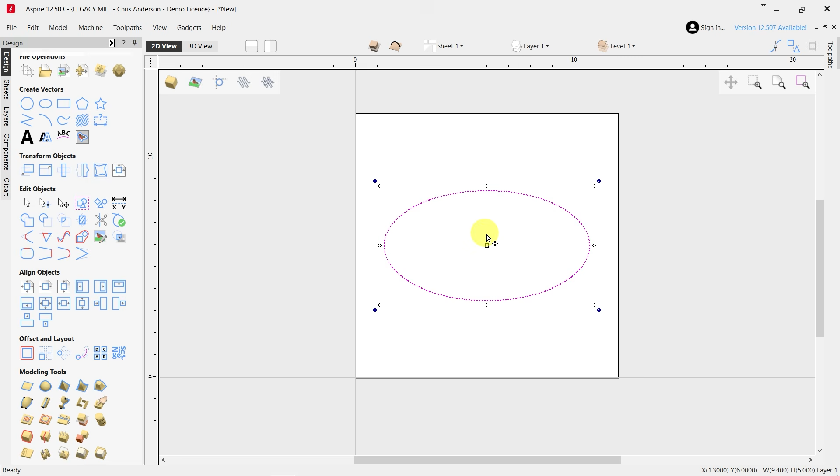So let's say we set it up to flip horizontally just like we did with the seat, and we push OK. Now here is what we're going to do. We're going to draw an elliptical shape here, saying that we're just going to cut something out of the shape, and I'm going to rotate it 45 degrees so it's not symmetrical in any way. It has a different layout for side 1 and side 2.

Now the most common thing that causes problems with this technique is if our blank isn't the exact size called for in the software. I'm going to draw a rectangle here that isn't the exact size. So the software calls for a 12-inch by 12-inch blank, but here let's say this was 11.9 by 11.9. You may be that far off, or less. Regardless, I just want to show you a more dramatic example so you can understand what's taking place here.

So this is going to be side 1. Now to flip to side number 2, you just click this button and it flips over to side number 2. I don't have any vectors on this side yet, so let's go back to side number 1 and use these to copy and mirror to side number 2.

So I'm going to select these, right click, and say copy to other side. Now if we flip over to the other side, this now has side number 2.

Now I want to point out, the bottom left corner is XY0, so the edge of the parts are going to be aligned with XY0, and we can even set a fence on our CNC for that corner.

And if we cut the blank out, let's say we were off by 0.1 inches from what was called for in the software, that's the difference here, 0.1 inch off in real life versus the software world.

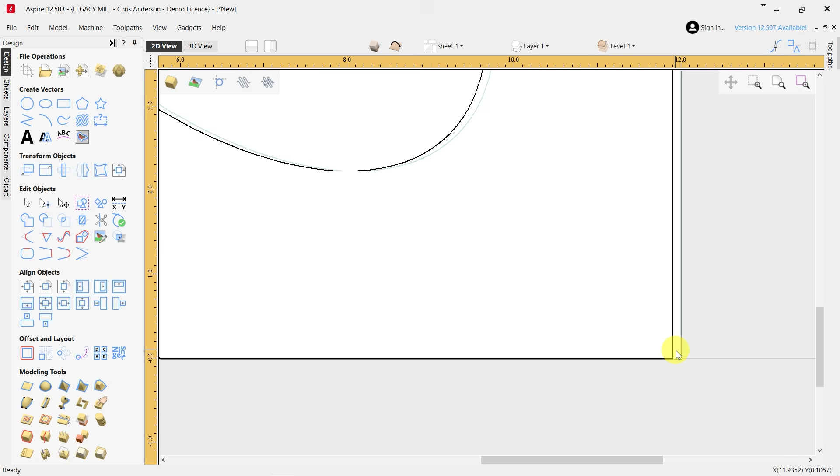So if we go to side number 2 now, when we make the bottom left corner the same XY0, that corner is going to line up with the XY0. Because if you have a fence and choose to make that corner XY0, that edge is aligned just like side number 1. So we have the same gap on the right side because XY is always staying in this corner.

Now you can see that when I shifted that back to that corner, because that's exactly what happens in the program and setup, we get some misalignments between side 1 and side 2. The gray line represents what's on the opposite side of the part, versus the darker lines are what we have on this face.

Whatever the distance is of what you are off physically from the software, in this case 0.1 inches off, it's going to double that. It's going to be 0.1 inches off on the right and 0.1 inches off on the left. So if you measure from the far left edge and then go to the far right edge of the opposite side, it's going to be double your error. In this case, 0.2 inches off.

That's a big difference and something you probably wouldn't be able to work with. Or it'd require a ton of sanding, okay?

So how do we fix that? Well, the only way to fix that in this setup, where it uses the double-sided setup that keeps the XY0 on the bottom corner, is you have to make sure your blank is the exact size called for in the software. So if it calls for a 12-inch by 12-inch blank, you have to make your blank exactly 12 by 12. If it's oversized or undersized by even a little bit, it's going to show up in your misalignment because you're keeping the corner alignment XY0 for side 1 and side 2.

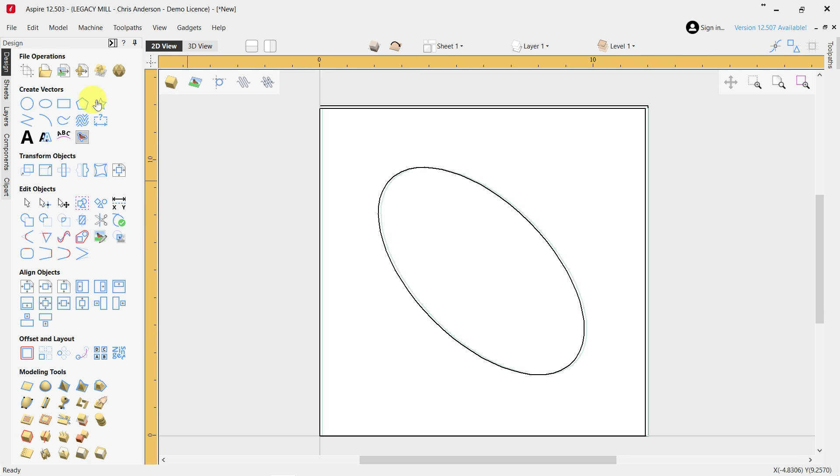Now let's show you how to fix that, where if you are off by a little bit, can we make it so that this isn't misaligned? You absolutely can, but you can't use the automatic double-sided function that's built in here. Let me show you something that's a little more forgiving. We're going to start over again.

This time, instead of doing a double-sided part, I'm going to do a single-sided part representing side 1. This will be the same blank size, 12 by 12 by 1.5 inches. I'm going to put Z0 on the top for this single-sided part and the bottom left corner for the XY0 on this first side.

So if I push OK, we can do the exact same thing. I can draw a rectangle here representing the size of 11.9 by 11.9, the same amount we were off in the first example. The software is calling for 12, but when I prepped my blank, I was off and made it 11.9, lining things up in the bottom left corner because that's where XY0 is located for the part and software. So now let's draw that ellipse again.

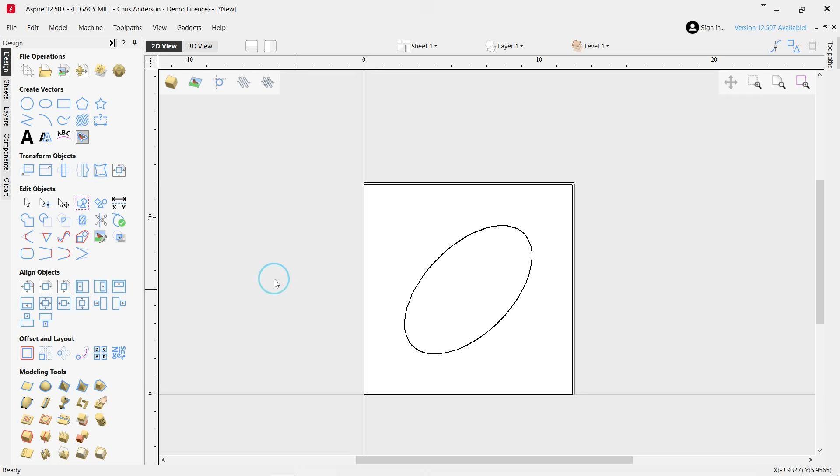Okay, something like that, rotated at 45 degrees, and that is side number 1. Now to flip to side number 2, we don't have that flipping option anymore. So instead we're going to use a feature called sheets, which allows us to create multiple components laid out on the same drawing board.

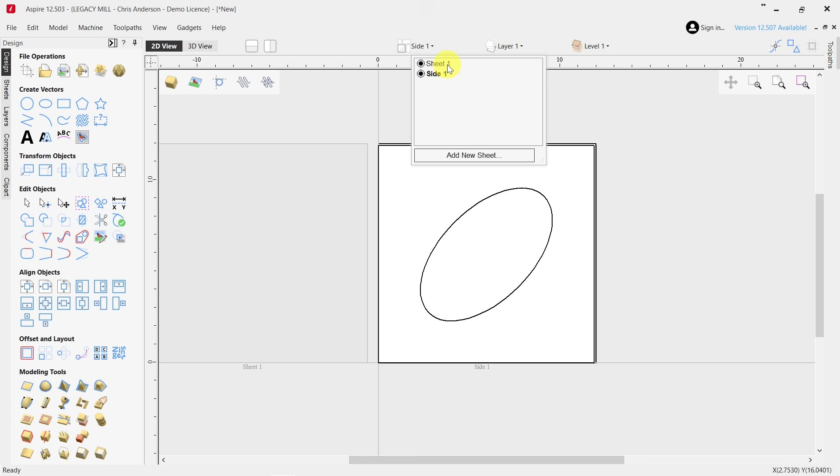I'm going to retitle this one first, calling it side 1. If we go add a new sheet, you can see it adds a sheet to my list here, and if I click on it, it selects it. I can also double click on one and it will select that sheet as well. So this is side 1, and this is sheet number 1. Let's retitle sheet number 1 to be side 2.

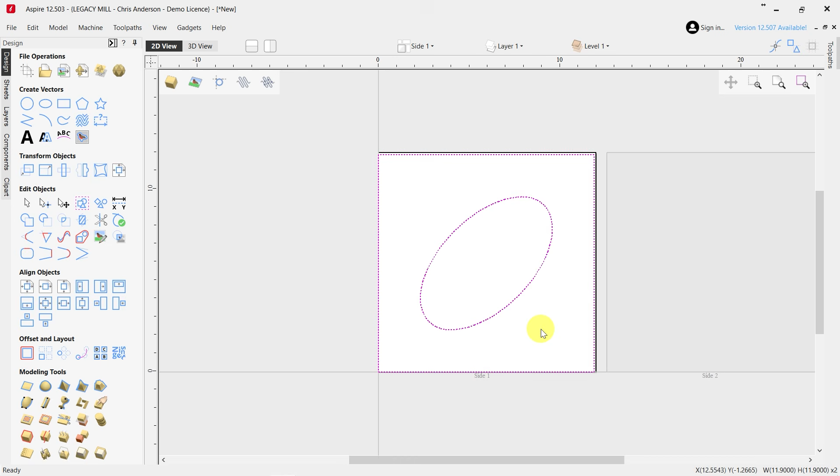Now all we have to do is bring over our vectors. If we take this and right click, copy to the sheet side number 2, it creates a duplicate on side 2. We go over to side number 2, and we have to make one change: when you flip the part, the design also flips, so you have to mirror it.

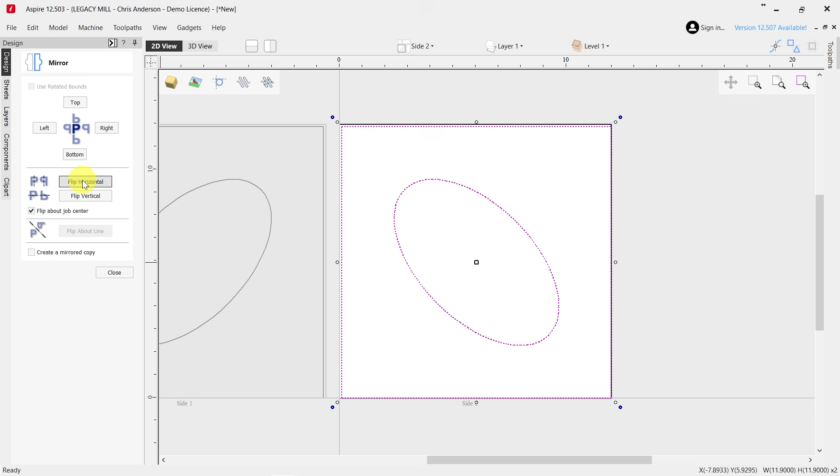So if we select all of our vectors and use our mirroring tool, making sure we're not creating a copy because we already have everything we need, and we flip horizontally, you can see that instead of the original rectangle being lined up with the bottom left corner with no gaps here, when flipping those vectors, the gap is now on the opposite side. So the bottom right corner is where there's no gaps because it's following that corner as it's flipping the vectors.

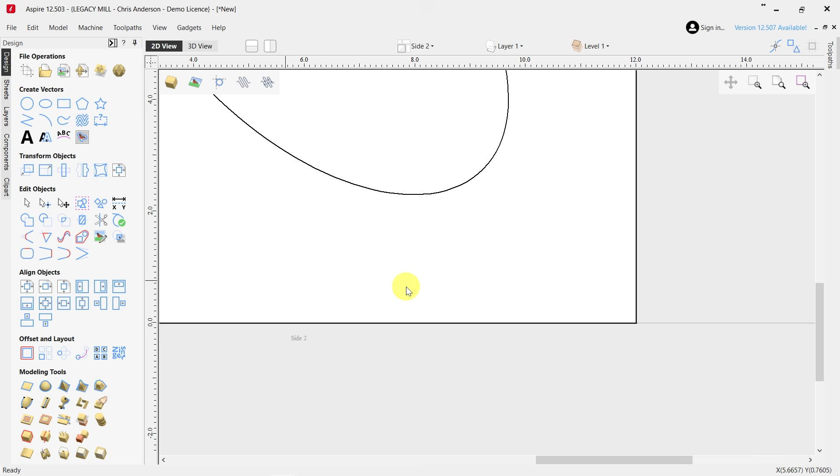If we do the same thing on the machine in real life, follow that corner and make that our XY0, everything will line up perfectly, even if we don't have the right size blank truly cut in the physical world. So let's go change this XY0 for side number 2.

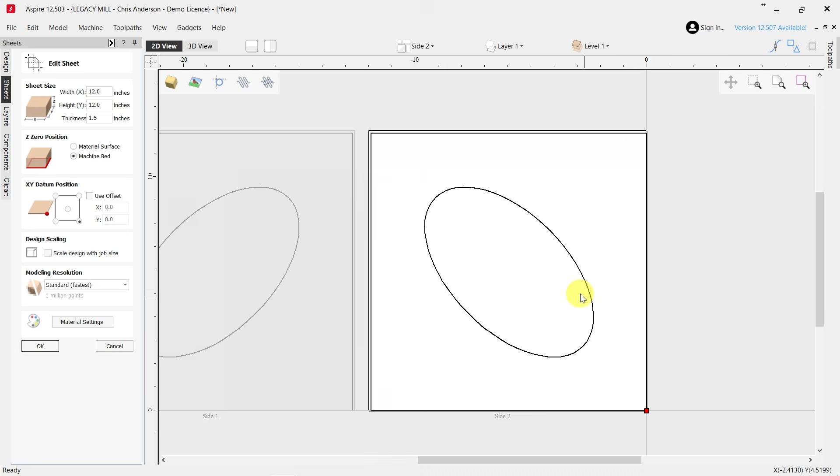So I'm going to come over here and right click on side 2, edit. Right here, instead of the Z0 being on the top, that was side 1, we're following that face. It is now on the bottom face for side number 2. And if we're following the corner that is here on side 1, and we flip it, that corner now aligns here to the bottom right corner. So we select bottom right, and now everything is lined up the way it should be.

And we've set up our X and Y and Z zeros to follow that same point, that same corner from side 1 to side 2. This is by far the simplest and most accurate way to do double-sided parts because it has built-in forgiveness. If your part isn't the exact size of what it calls for, it doesn't matter. Follow that corner, everything else will turn out.

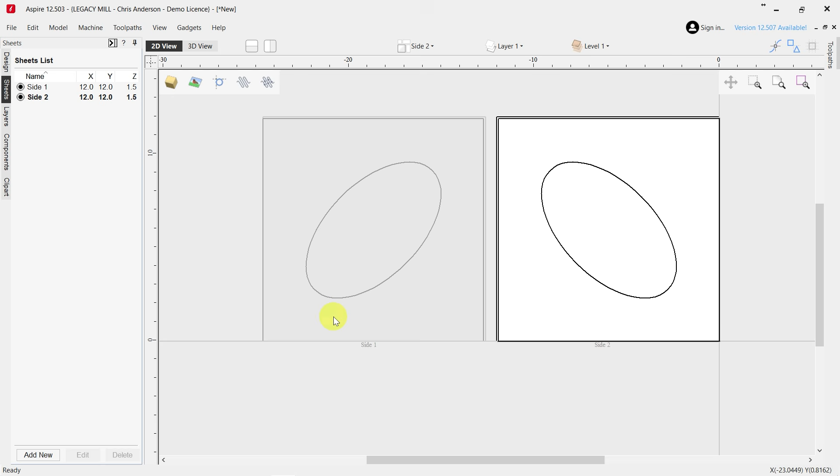The other thing that's critical for double-sided parts is to make sure that when you're flipping along a side—we're flipping horizontally, so that means my bottom edge needs to be perfectly parallel and true to the machine. So your fixture is really important along the bottom edge so that when you flip it over from side one to side two, one side isn't twisted and misaligned from the other. These edges need to be parallel to one another in the machine. So if you follow those practices, you're going to find some really awesome success doing double-sided parts.